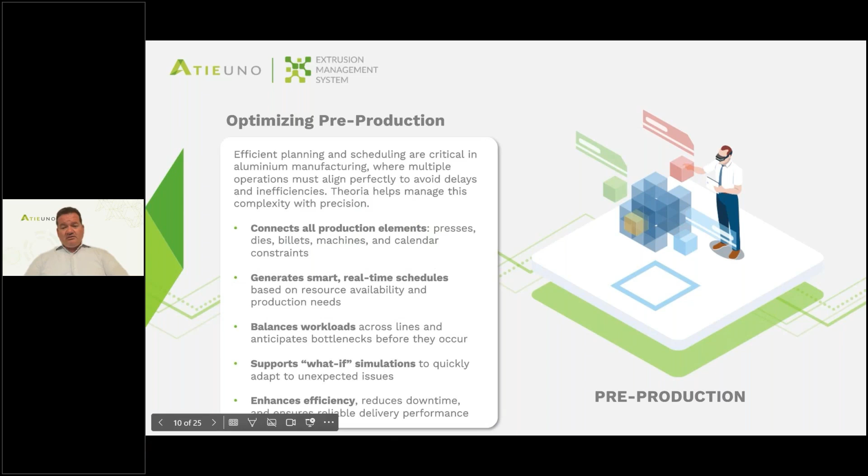Now, let's talk about the pre-production phase, where planning and scheduling become really important. In an aluminum production plant, you have many things happening at the same time: presses, dies, raw materials, machines for finishing and fabricating, packing lines, and much more. Everything needs to be available and ready at the right time, or else you get delays, production stops, and unhappy customers.

This is where Theoria comes in. Theoria is a powerful tool that helps you plan all the production activities in the best possible way. Theoria connects all the different parts of the production chain, like how many billets you have in stock, which dies are ready or under maintenance, which machines or consumables are available, or calendar restrictions set by the planning department. It takes all this information and creates a smart production schedule.

It also uses strong algorithms to balance work across different production lines, so none of them stay idle for too long. It can even spot future problems, like when a production line might be overloaded or bottlenecks jeopardize the optimal production flow. Before they happen, you can fix things in advance.

Another cool feature is that it lets planners do simulations. For example, if something unexpected happens, like the press goes down, you can run a what-if scenario to see how to change the schedule quickly. This flexibility is really helpful in keeping production running smoothly.

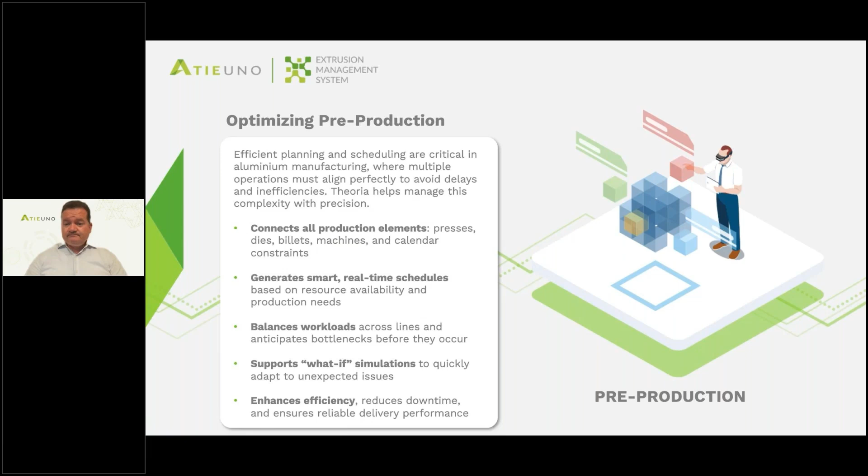Let's now look at what happens during the actual production. Specifically, how we control the extrusion process. Making high quality aluminum profiles depends a lot on keeping the process stable. Things like the temperature, the pressure, the speed of extrusion, and the type of billet being used all need to stay between the right limits. If they change too much, the quality goes down, and you end up with more scrap and longer setup times.

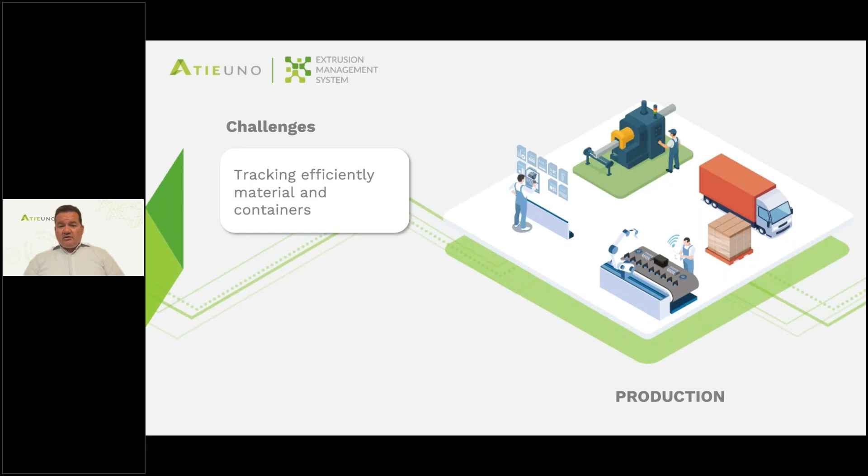To manage this, we use the system called EMS third generation. This system automatically collects all the important data directly from the machines. Things like how hot the press is, how fast it's running, the cooling rates, and the die setup. All this information is saved and linked to each profile and production batch.

Then, when you need to make the same profile again, EMS third generation looks back at the best past runs and either sets the same parameters or recommends them to the operators. This makes the process more repeatable and helps avoid mistakes. You don't need to start from scratch every time.

Over time, EMS also builds up a lot of useful data. Engineers can use this to see trends, find problems, and improve processes step by step. So it's not just about keeping things stable today. It's about making the whole system better over time. In short, EMS third generation helps to reduce waste, save setup times, and keep quality high. It turns process control into something smart and automatic instead of manual and error prone.

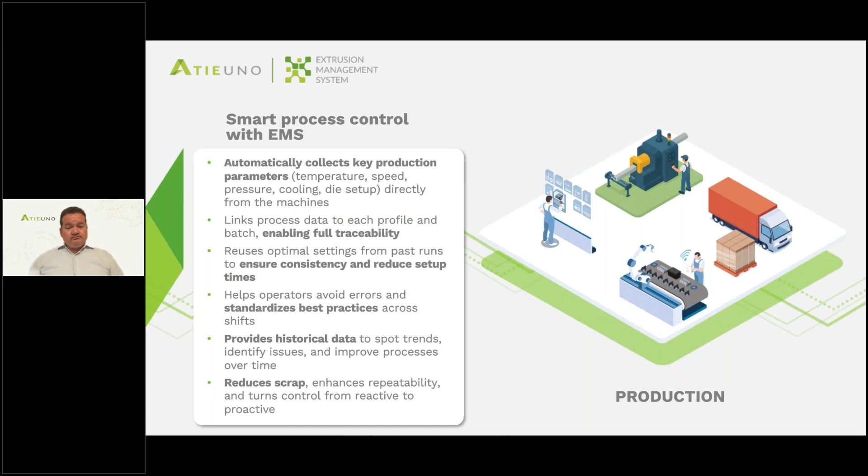Now, let's talk about quality control. In aluminum extrusion, quality is everything. If the profiles don't meet customer requirements, maybe because the material isn't right or something went wrong during production, it can cause big problems. The product might not work as expected, and customers won't be happy.

To avoid that, we use a digital quality control module that connects directly to the production system. It checks and records all the quality related information while the profiles are being made. This includes measurements, inspection results, and even reasons for scrap. Everything is tracked and saved, so you can always go back and see exactly what happened.

One of the best parts is that this system also connects to measuring tools and allows operators to enter data during production. If something isn't right, the system can send an alert immediately. In that way, the team can act fast and fix the issue before it becomes a big problem. You can also get powerful reports that show trends, like if the same issue keeps coming up in a certain machine or shift. This helps engineers figure out the root cause and prevent the problem in the future.

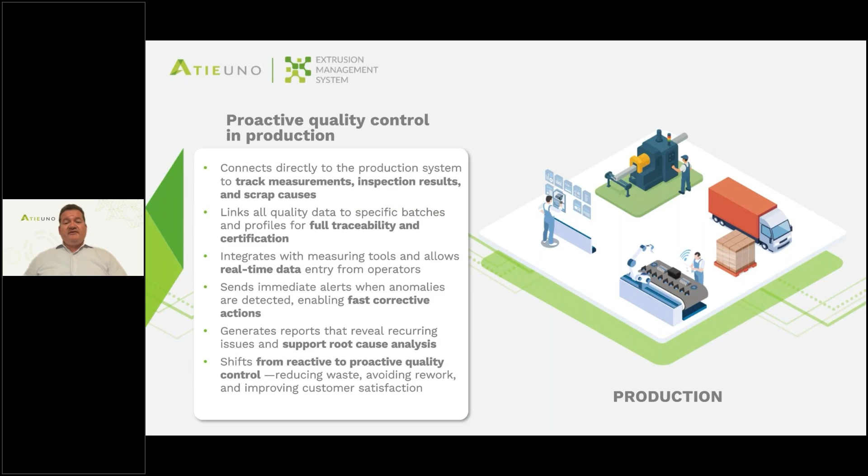Let's move on to logistics. In an aluminum production plant, moving materials through the different stages like pressing, aging, cutting, finishing, and so on can be really complex. Profiles are placed into baskets that travel around the plant, and if you lose track of where a basket is or what's inside, it can cause delays, mix-ups, or even lost material.

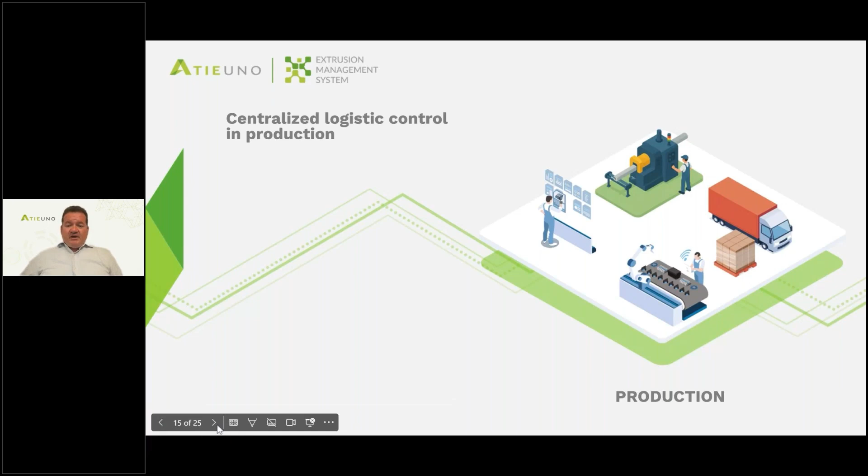That's why the central logistic module is so useful. It gives every basket a unique digital ID. In this way, the system can track it in real time: where it is, what process it's in, how long it's been there, and what's inside. This helps operators and supervisors always know what's happening on the shop floor.

If you connect the system to the warehouse management tools, it can also do more advanced things automatically. For example, it can control conveyors, send instructions to automated vehicles, raise alarms if there are delays, or help use space in the warehouse more efficiently. It even checks if the right basket is going to the right process at the right time, so everything stays on schedule.

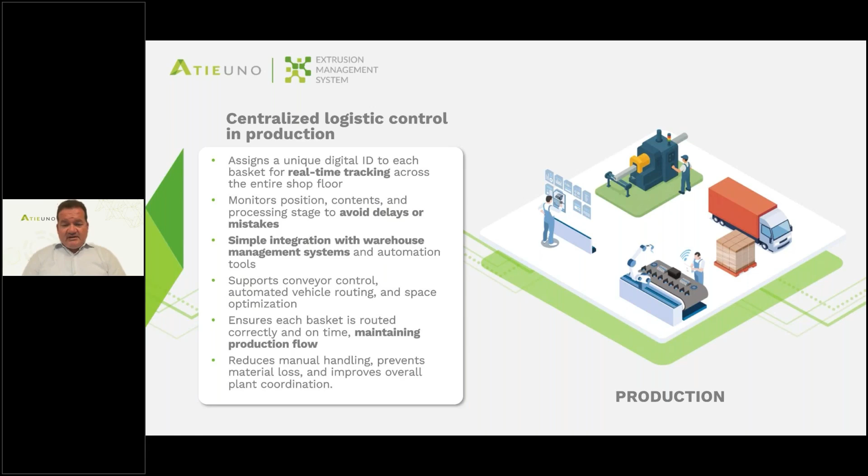This kind of system cuts down on manual work and human mistakes. It makes sure materials don't get lost and that production flows smoothly from one step to the next. Overall, central logistics helps the whole factory run more like a well-organized machine, and that's key for staying productive and competitive.

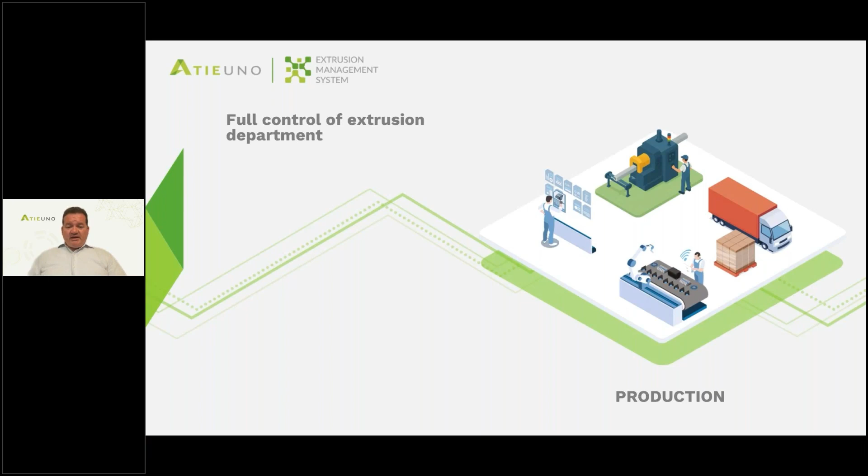Now, let's talk about the heart of the aluminum extrusion plant, the extrusion press. This is where the actual shaping of the aluminum happens, and it's a process that needs to be tightly controlled. If anything goes wrong here, wrong temperature, incorrect pressure, or bad timing, it can affect the entire product. That's why the press supervisor module is so important.

It connects directly to the machines and constantly reads data like temperature, pressure, ram speed, billet length, and more. It lets the operator see everything in real time and make sure the process follows the exact recipe. It even adjusts billet length automatically, depending on how the press is performing and how the die is behaving. In that way, you get less scrap and better yield from each billet.

Working together with this is the die master module. This handles everything related to the dies, whether they are available, in use, or under maintenance. It keeps a full history of how each die performs, tracks how often it's been changed, and shows exactly where it is in the plant.

So, when it's time for a setup, the right die is ready and easy to find, saving time. And by using both of them, the plant gets full control over the extrusion process. Everything becomes more stable and predictable. Changeovers are faster, and teams have the data they need to keep improving operations.

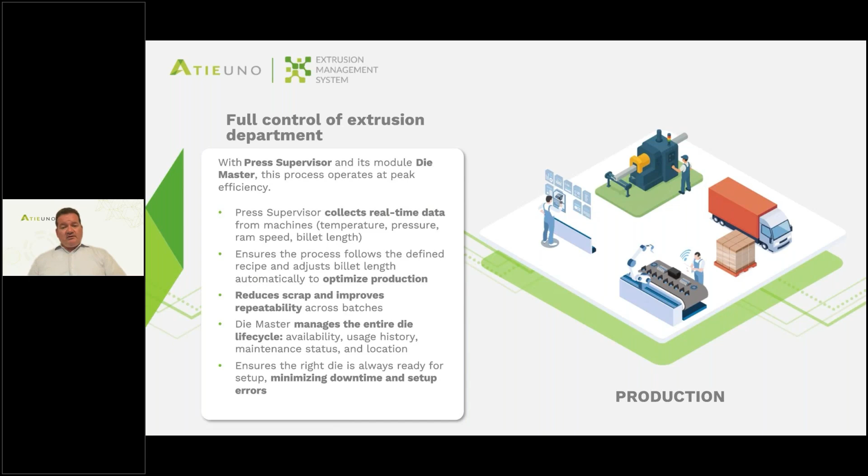Let's move on to the finishing department. This is where the profiles get their final surface treatment, such as anodizing or powder coating. These steps don't just make the product look good, they also protect it from corrosion and give it the right texture or color based on what the customer wants.

But finishing is a multi-step process and it has to be done right. If something goes wrong at any stage, maybe the pre-treatment wasn't done properly or the coating temperature was off, you could end up with defects and affect the whole batch. To keep things under control, we use a finishing module that tracks every batch or basket as it is moving through all stages, from pretreatment to anodizing or coating, and finally to unloading.

Supervisors and operators can see exactly where each basket is, what it's doing, and how long it's been in each stage. It also records any scrap along the way, showing where problems happened and connecting them to things like the process parameters, who was operating the machine, or even what time it occurred. This makes it much easier to find and fix the root cause of a defect.

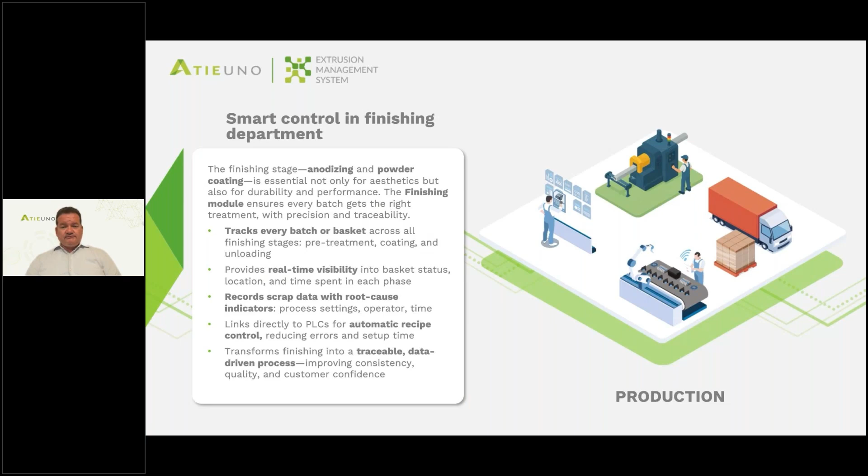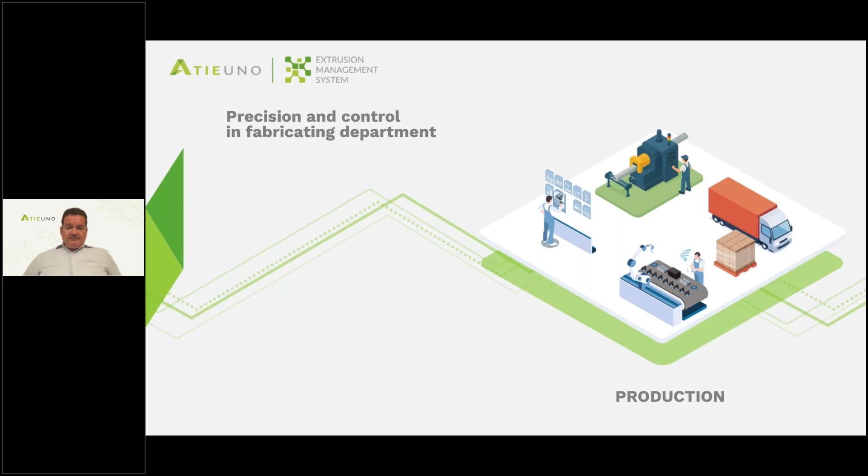Now, let's talk about the fabricating department. This is where the extruded profiles are turned into finished products. That includes cutting, punching, drilling, milling, or thermal break assembly. These steps are very detailed and must be done precisely to avoid mistakes or delays. To manage all this, we use a fabricating module.

It gives a clear view of what's happening in each machine or station in real time. You can see how many profiles are being worked on, how each machine is performing, and if any station is slowing down the workflow. This helps operators and planners react quickly to keep things moving smoothly.

For thermal break assembly, which is where a plastic strip is inserted into the profile for insulation, the system also makes sure everything follows the customer's instructions exactly. It checks quality, records defects, and links everything to who did what and when. If there's any scrap or rework, that's logged too. The data helps the team see patterns and fix root causes over time.

Since the module is also connected to the machines, it can automatically apply the correct settings, reducing the chance of human errors and making sure each profile is processed correctly. So, in short, this module helps ensure that the last step in production, the one that gets the product ready for delivery, is just as organized, efficient, and high quality as everything that came before it.

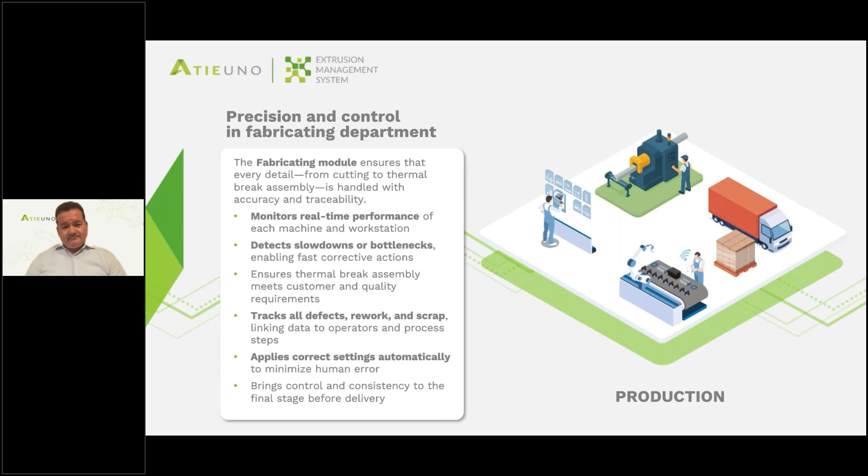Let's finish with a very important topic, data analysis. In modern extrusion plants, there is a huge amount of data being collected every day. It comes from all areas: feasibility, pressing, finishing, logistics, and fabricating. The challenge is not just collecting this data, but actually using it to make better decisions.

That's where extrusion intelligence software comes in. It's a business intelligence or BI tool made specifically for the aluminum extrusion industry. This system brings together data from across the entire factory and shows it in one easy to read dashboard. You can see key performance indicators like press productivity, scrap rates, reasons for downtime, on-time delivery rates, and overall equipment efficiency. It also lets you go deeper when needed.

For example, you can look at how specific dies are performing, how much energy is being used, or where quality problems are happening. And because it connects directly to machines, PLCs, and even our ERP systems, all the information is live and accurate. You can create your own reports, spot trends, and compare shifts, presses, or time periods. This helps managers and engineers make smart choices, like how to fix bottlenecks, reduce waste, or improve delivery performance.

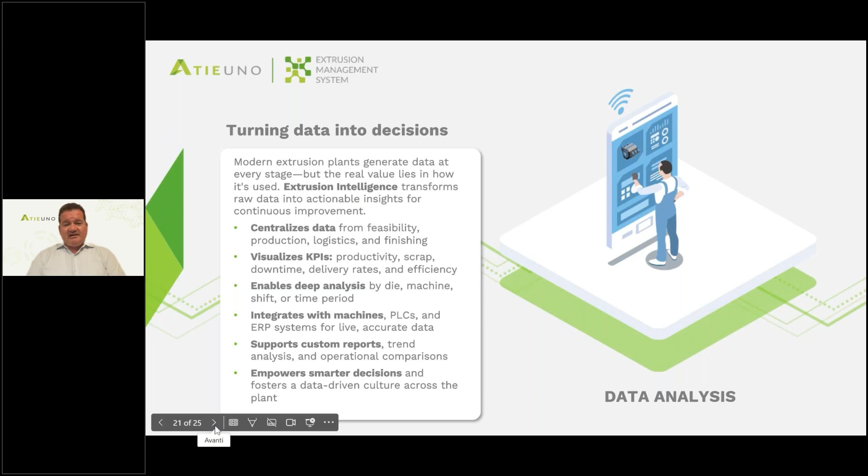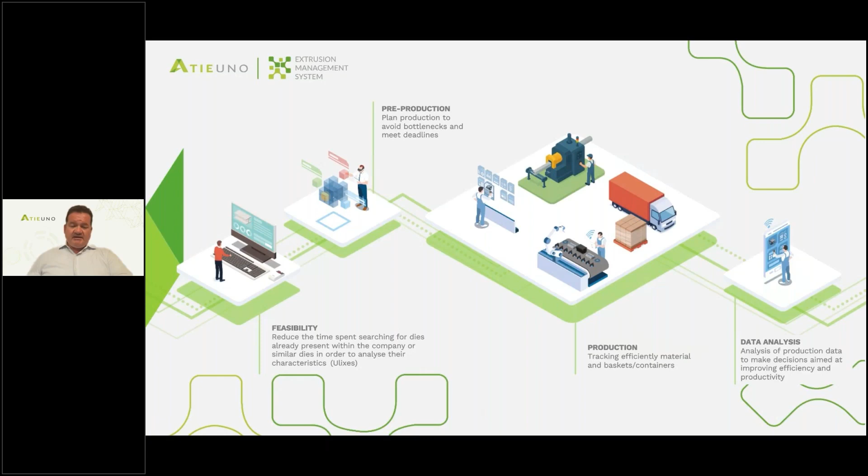In short, extrusion intelligence turns all that production data into real, useful insights. It helps your plant become more efficient, more predictable, and more competitive. And maybe even more important, it builds a culture where decisions are based on facts and not guesses. And with this, we have finished our journey of data flow in the plant. And let's go to the Q&A part of the presentation with Marco.